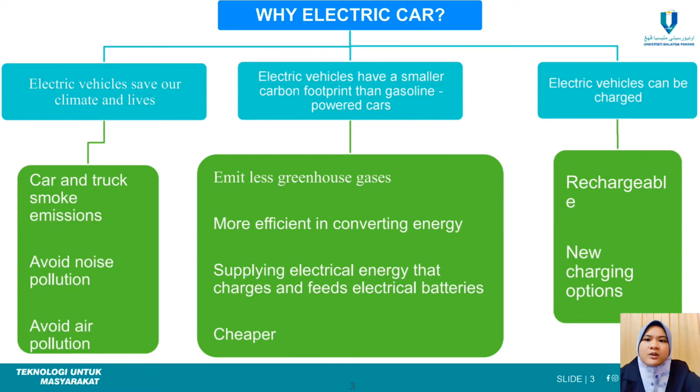Next, I will explain about the electric vehicle technologies. So, for the electric vehicle technologies, I will focus on the electric vehicle regenerative braking modes. Regenerative braking is the most visible difference between driving an electric car and a standard ICE vehicle.

Regenerative braking refers to the operation of an electric motor in reverse, which applies a braking force via electromagnetism. By charging the battery, some of the vehicle's kinetic energy is recaptured. Specific driving modes with a variable amount of regenerative braking are available on several electric car types.

When a driver takes their foot off the accelerator pedal in a typical driving situation, an electric vehicle like the Tesla Model S employs regenerative braking to decelerate the car. The standard option delivers the highest regenerative braking power, capturing the most energy while reducing brake wear and tear.

The low setting, on the other hand, features a lower regenerative braking force, which absorbs less energy but allows the car to coast further than in standard mode.

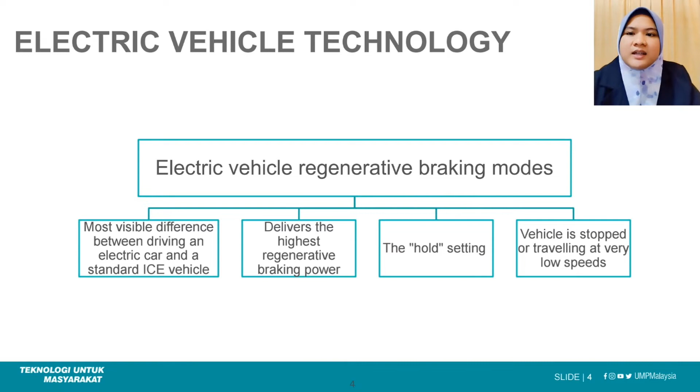When the car comes to a complete stop, this function automatically activates the friction brakes, which hold the vehicle in place until the driver's foot is placed on the brake or accelerator. Okay, next I will explain the electric vehicle mechanical composition.

All electric cars, often known as battery electric vehicles, or BEVs, store the electrical energy that drives a motor in a battery pack. Plugging the car into an electrical power source charges the battery. Electric vehicles, both heavy and light duty, are commercially accessible. BEVs are normally more expensive than conventional and hybrid cars, while some of the expenses might be mitigated by fuel savings, federal tax credits, or state incentives.

So these are the components of a general electric car, and I will explain the function of each component. So the first one is the battery. The battery in an electric car provides electricity to power vehicle accessories. Next is the charge port. The charging port allows the vehicle to charge the traction battery pack by connecting to an external power source.

Next is the DC/DC converter. This device converts high voltage DC power from the traction battery pack to the lower voltage DC electricity required to operate vehicle accessories and charge the auxiliary battery. Electric traction motor. This motor powers the vehicle with the help of the traction battery pack. Motor generators are used in certain vehicles to provide both propulsion and regeneration.

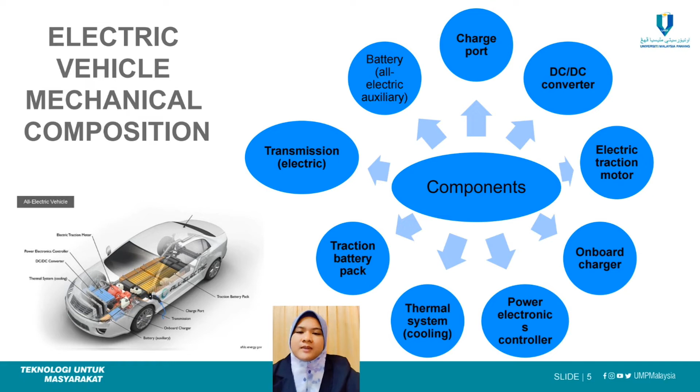The next is the thermal cooling system. This system keeps the engine, electric motor, power electronics, and other components within a safe operating temperature range. The next one is the traction battery pack. Electricity is stored here for use by the electric traction motor. And the last one is the transmission. The transmission is responsible for transferring mechanical power from the traction motor to the wheels.

Hi, my name is Muhammad Amiruddin bin Ghazi, and today I will present about the vehicle modeling and simulation tools. So before we start the analysis, we gathered information from websites about the dimensions of the car that we use, which is the Nissan Almera 2020. And as you can see here, the wheelbase is 2535, and this is the design that we chose for our project before we do the analysis using CFD.

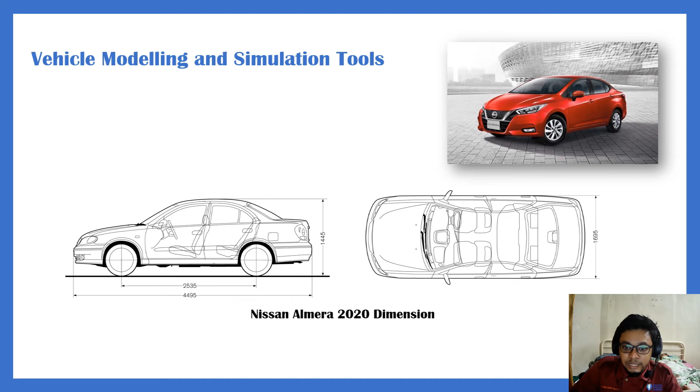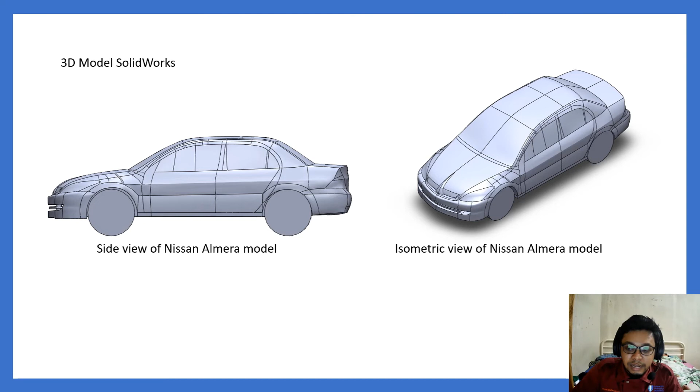Now we model it in SolidWorks to get the 3D model, and after we do the 3D model, this is the result. As you can see here, this is the side view of the Nissan Almera, and this is the isometric view of the Nissan Almera model. And then we do the analysis using the flow simulation in SolidWorks. As you can see here, we get the isolines data and surface plot data.

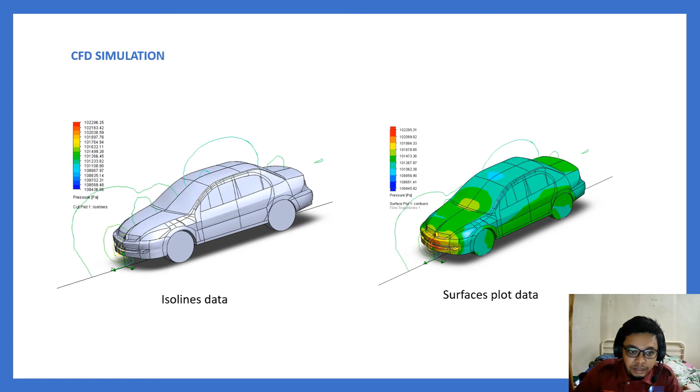Okay. Now I will explain the parallel hybrid vehicle design. The hybrid electric car has characteristics of both an electric car and an internal combustion engine. It runs like an electric car at low speed, where the battery supplies the drive power, and the engine and the battery work together to supply the drive power demand at greater speeds. The distribution and sharing of power between these two sources is an important factor in fuel economy.

Then the ICE and electric motor are connected in parallel to supply power to the wheel in a parallel hybrid setup. Then mechanical connection is used to combine the power of electric motor and ICE. So the vehicle can be driven with the internal combustion engine, the electric motor, or both at the same time.

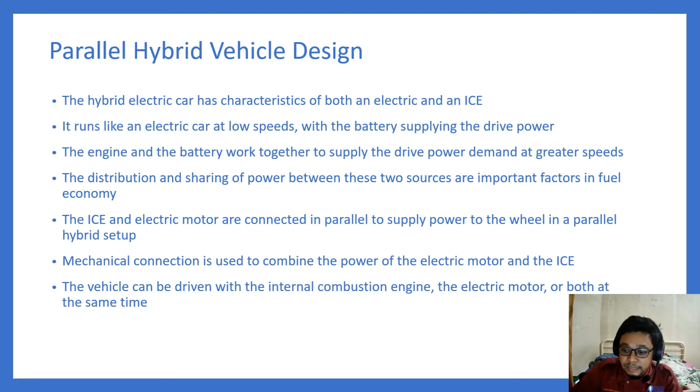So I will explain also about the energy management system. The main function of EMS would be first to optimize energy flow for better efficiency, and second is to predict available energy and driving range. It proposes a suitable battery charging algorithm, it uses regenerative braking to charge the batteries, it suggests more efficient driving behavior, and it also reports any malfunction and corrects them.

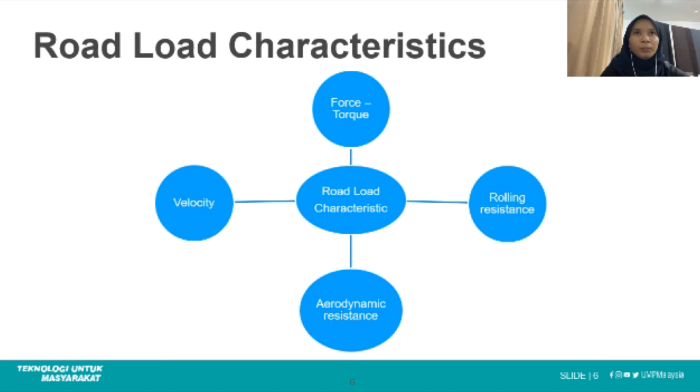So next is the electric motor design. The first step is determining the load characteristic. Torque and speed versus time is the first and most crucial stage in electric motor selection. Electric motors are chosen based on mission objective, available power, and cost. Step 2 is starting and running torque. Electric motor starting torque requirements can range from a tiny percentage of full load to several times full load torque.

And the last step is gear reducers. Electric motor driven systems feature sections that revolve at various speeds. Rotating components must be reduced to a common base in order to compute the acceleration torque necessary for these electric motors.

So here for the internal combustion engine design, the graph below shows that combustion engine flexibility indicates its ability to adjust to varied loads and engine speeds. This is a very important index in determining the operational potential of traction engines. The dynamics coefficient is a numerical expression of engine dynamics, given by the formula E equals M max over M at N max, multiplied by N over N max.

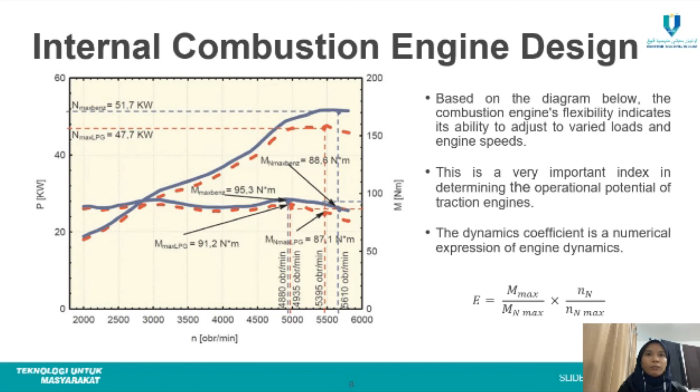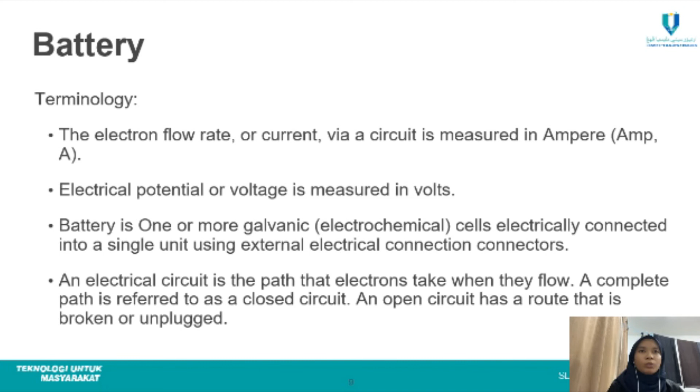So for the battery, there is battery terminology. The first one is the electron flow rate, or current, via a circuit, measured in amperes. Then electrical potential, or voltage, is measured in volts. A battery is one or more galvanic electrochemical cells electrically connected into a single unit using external electrical connectors. An electrical circuit is the path that electrons take when they flow. A complete path is referred to as a closed circuit. An open circuit has a route that is broken or unplugged.

So moving on to hybrid electric vehicles, they are regarded as an alternate mode of transportation because pure electric cars lack a suitable supply of energy for driving over long distances, and their recharging process might take a few hours. Hybrid electric vehicles have increased fuel efficiency and decreased pollutants when compared to conventional automobiles. The efficiencies of the two types of vehicles are shown in the table below.

So it shows the significance of tank to wheel efficiency, TTWE, and well to tank efficiency, WTTE. Moving on to the electric vehicle simulation, the slide shows the simulated vehicle operation on the highway drive cycle on the left, and on the right is vehicle operation on the city drive cycle.

So for the conclusion, the importance of electric vehicles and their technologies is well explained in this project. CFD analysis of the Nissan Almera model has been interpreted using flow simulation in the software SolidWorks. Hybrid electric vehicles are obviously more ecologically friendly than vehicles based on the ICE, internal combustion engine.